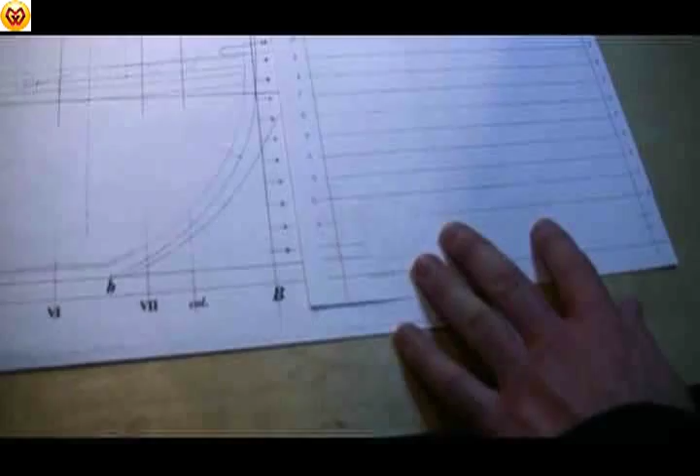So the distance of the waterlines is the same. Even if there is a mistake here in the distances, it is not important for us, because this mistake

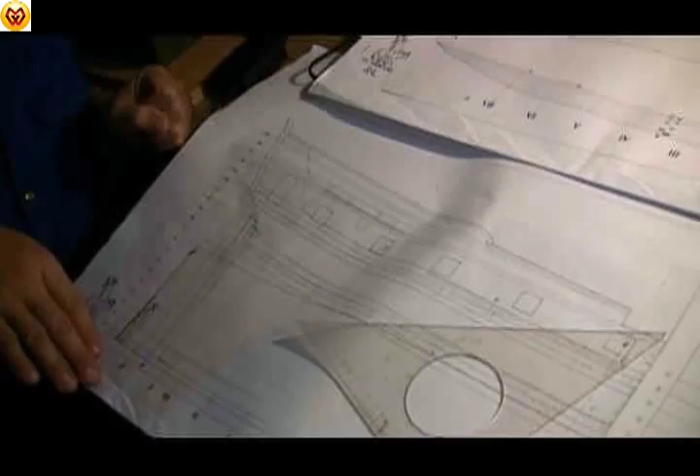will be repeated here, and we must only follow by checking the distances here against another kind of view. Later we shall escape from this

So, where did he measure? From here to here? Here is 4 millimeters. Here, that's half of the keel.

Okay, so we're measuring this distance, which is actually the waterline view, and half the thickness of the keel. That's the full keel, but we're actually measuring the value there, which is half the keel.

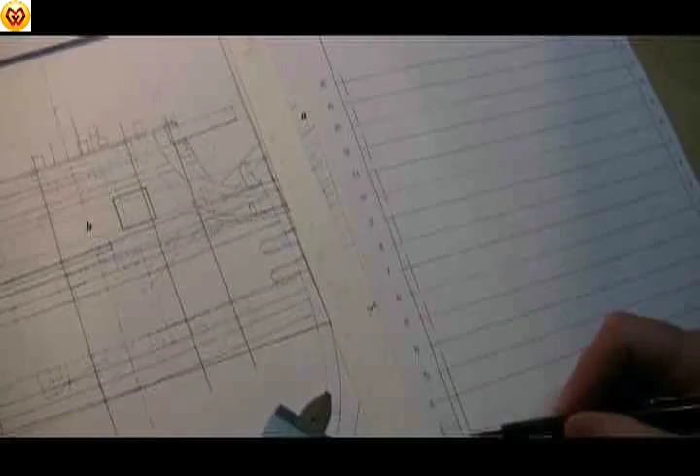What he's done is actually 4 millimeters, and he's drawn a dashed line 4 millimeters from this line, which is going to be half the keel, because this is going to form half of a full frame. That's why we're considering half the keel, and it's going to sit like that.

It's measured from the waterline plan, because we don't trust this other plan — it has mistakes, and this is the one we trust. You must repeat it as many times as the quantity of frames.

Now he's scanning the picture. We've just added half the keel, and he's going to copy this the same number of times as there are frames in the model. This will be the standard template he uses.

Yes, that's all correct. We'll set it, and then later he will adjust the thickness of the keel.

Now we transfer this marking onto this paper. Here is our base, right? Now we must transport our base marking onto this paper.

One. Two. Three. Four, and so on.

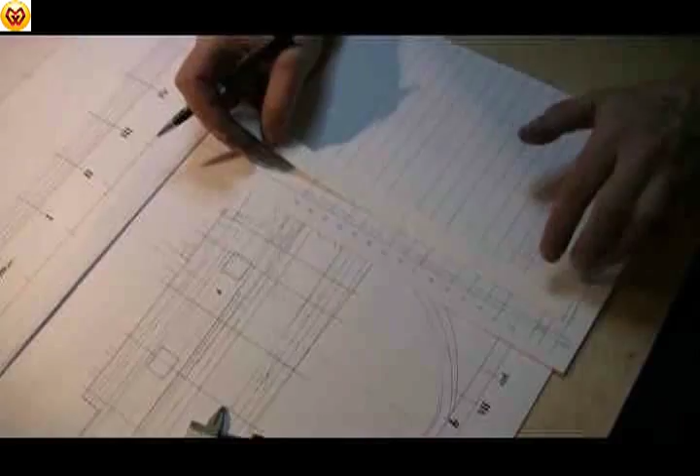The maximum height of the frame, which was indicated by the star earlier. Yep, I remember that.

Now all these points must be connected with each other. This will be our maximum. Maximum height is here.

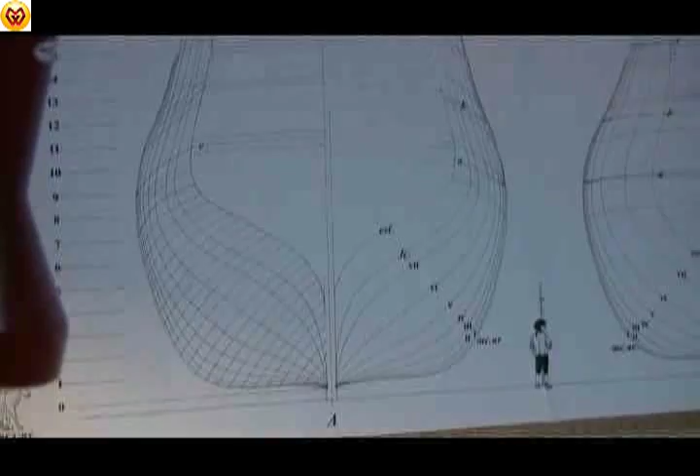We can realize that this plan is made without the planks, this section is provided for. But when the English captured a French vessel, they often made the plan including the final planking on the hull.

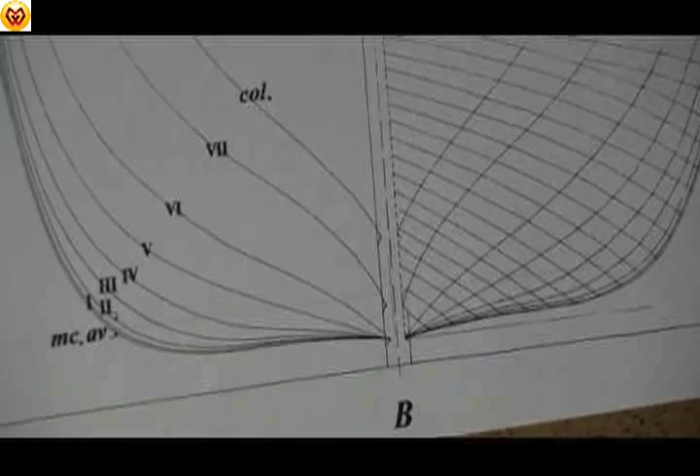The dashed line shows where our frame will connect with the keel. Pay attention - it should be located inside, at the rabbet. Here is where it should be located.

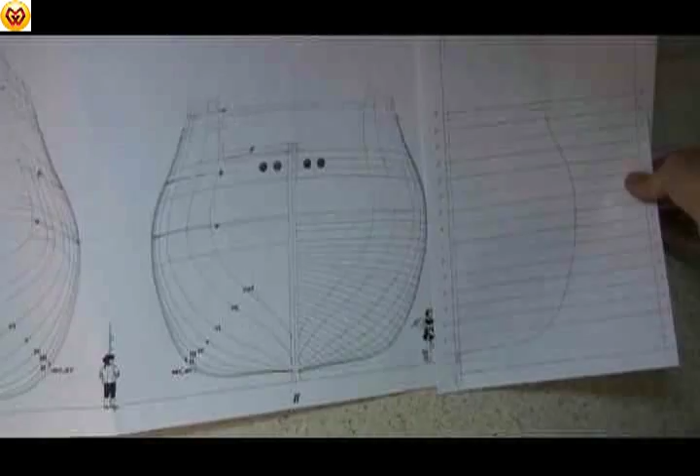After finding such mistakes, we must compare all three plans we have and correct them one after another - all three simultaneously must be corrected when we find even one mistake.

Now we'll remove this. Maybe you will discover that it is only the mistake of your pencil and your eye when you put these distances on the ruler. Can I ask one question, please?

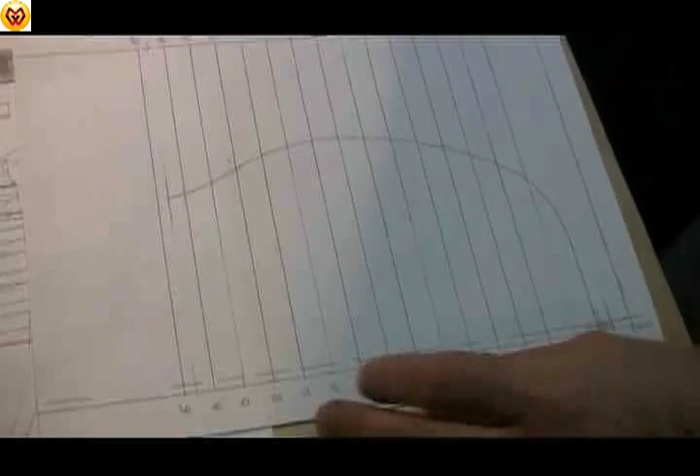This this distance here, where

See that distance between the dashed lines? That's the depth of the rabbet, which corresponds to the thickness of the final planking. He's left the same distance there, and I assume the rabbet will be cut there, and the final planking will fit into that. So the depth of this rabbet equals the thickness of the planking, and this will be covered.

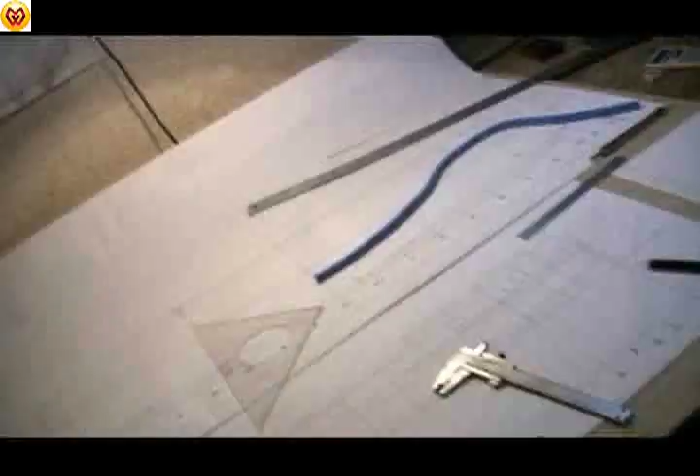The copy must coincide with the original. This is why I asked, because I remembered you said a photocopy might change the plans, and I thought maybe printing would change the plans.

Anyway, our mistake will be not more than half a millimeter. Even if our printer is bad, the mistake on this small paper won't be so much. The mistake increases when our drawing is one meter long.

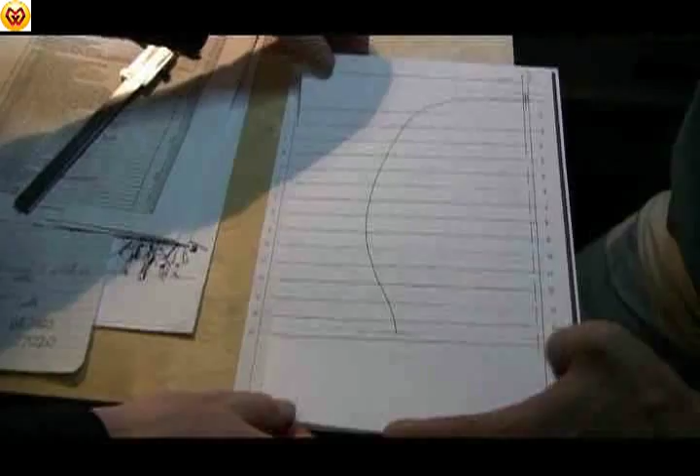He'll fix waterline 9 - I'm not happy with this one. Okay, we've got the printed copy. So we've just scanned it and printed it, and now we're comparing the original and the copy to make sure that they're the same.

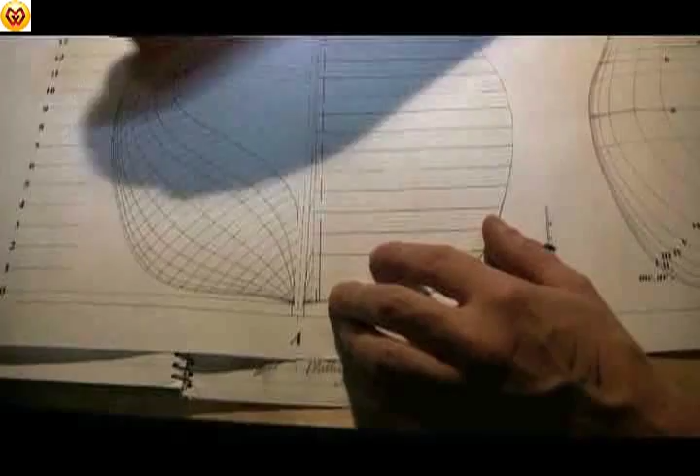He's lining up the ninth waterline on the shape we've cut out with the ninth waterline on this plan, just to see whether there's a match.

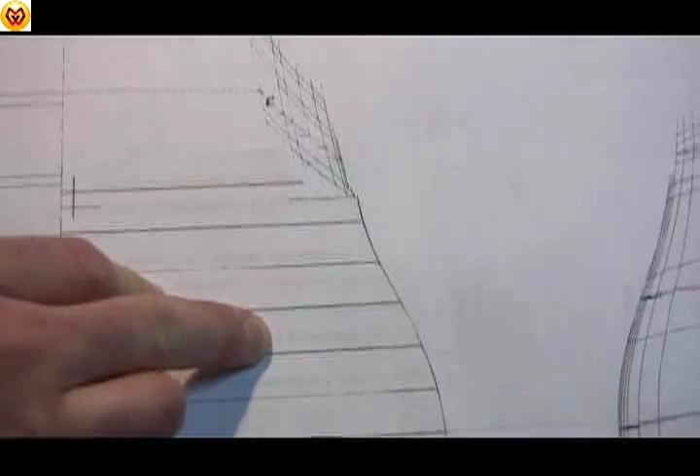And here, you see, there is a difference. You can see there's a difference between them.

There is a difference, I'll just get this. In this section here, you see the actual line on the plan and the shape we've cut out, which sort of ends there. Clearly a difference.

And up here as well. You can see it overlaps. It overlaps where it should go, slightly, a fraction of a millimeter.

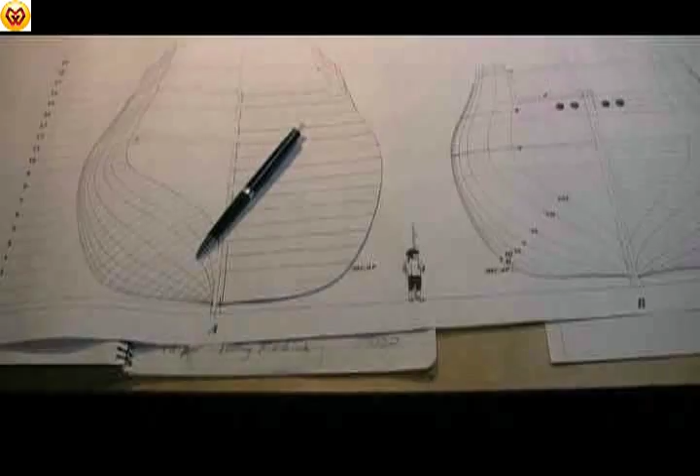He must do it this way. It's my mistake. Small mistake. Ah, okay. He's made a small mistake, he said. No planking? No planking.

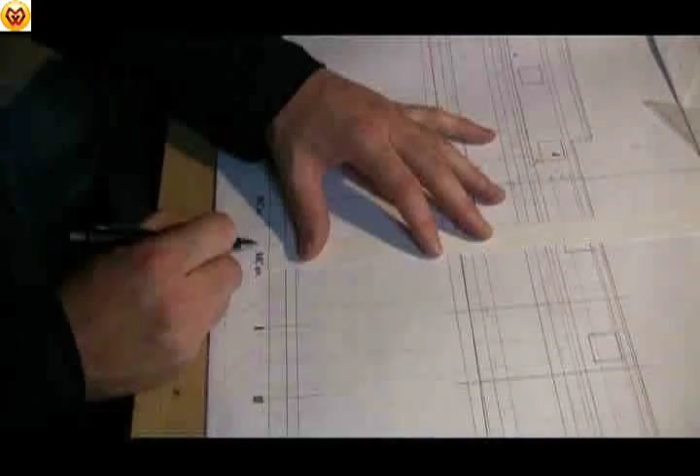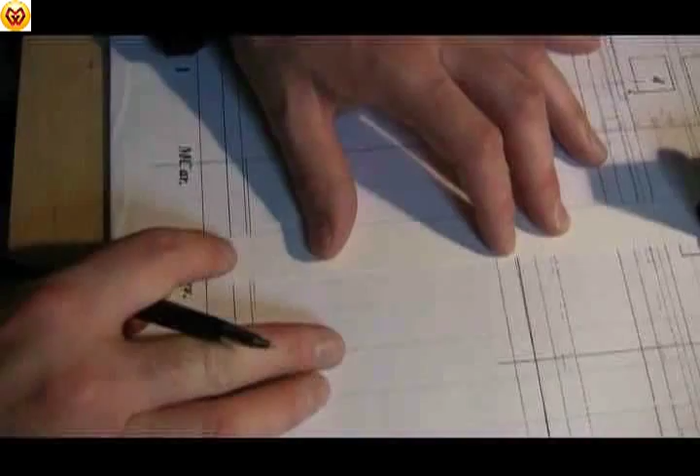The base. So frame 2. Yes, base. Press the bottom of the keel with the help of small metal. Okay. That's all right. Bottom of keel. Top of keel.

This line important? It is a line of planking, not necessary. Line of planking. Thickness of planking. Okay. Try to do thin lines, not thick. This is whale 1. Whale 2.

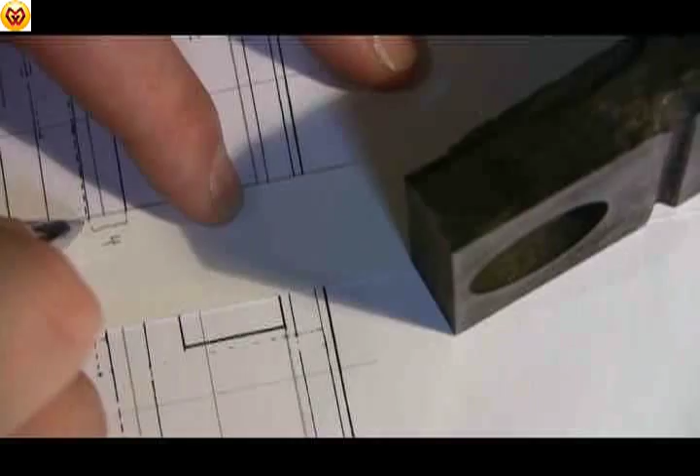Waterline. The example. I'll put that there. Use the same badges on the paper like Dr. Mike made on the previous one. For the whales there is one badge, for the top there is a cross, and so on. Deck. The deck corresponds with the top of whale 2 there.

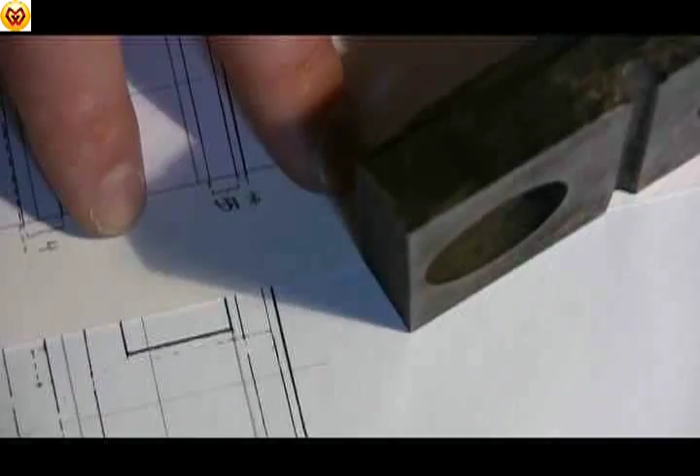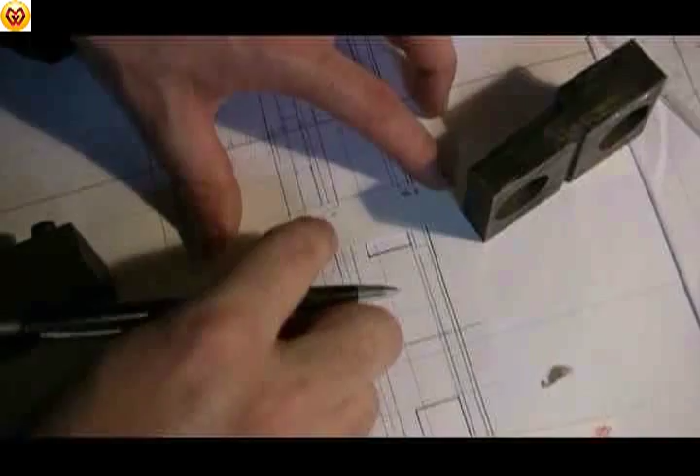And this is the top of the deck, which will be indicated with a star. Deck 1. Deck 2. These narrow lists of paper, rulers, will be helpful for us when we shall be busy with building the hull itself from the wood. The lines for whales we have already, and we shall mark them on the surface of the wood with the help of these marks, but using another instrument, Reismus, Streichmaß.

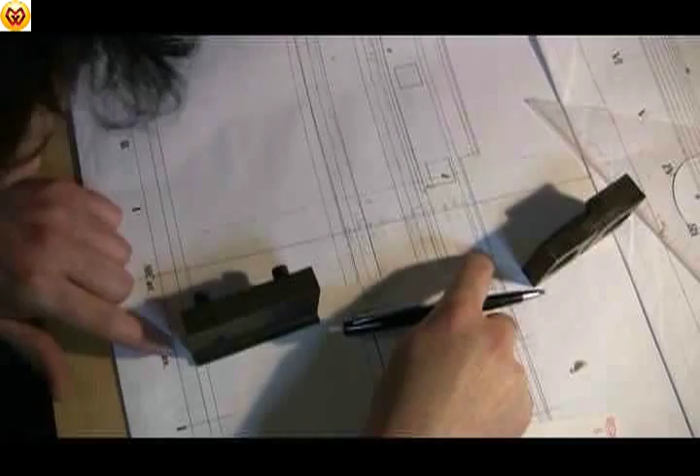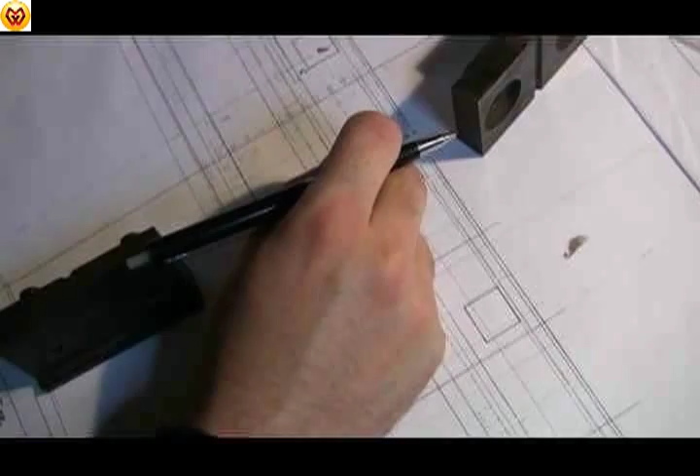Can I ask, does he put the paper on there or down? Good. Okay. So again, that's the thickness of the planking. Yes. Don't hurry. I'm just going to touch this up because I think the paper...

So I've done the broadside plan. Now I'm going to turn this over and do the waterline plan. Oops, actually I won't write a 2 on that. Actually we're going to start, I think, with the section above the waterline, frame 2. Indicate the base and get a...

Just move that so the shadow doesn't... You can see I've just marked each of the water lines. I've marked the places where the waterline intersect the piece of cardboard carefully, and I'm just going to number them. Waterline 3, 4, 5, 6, 7, and the top one is 8. And now we're going to turn this over. I'm just going to write below waterline.